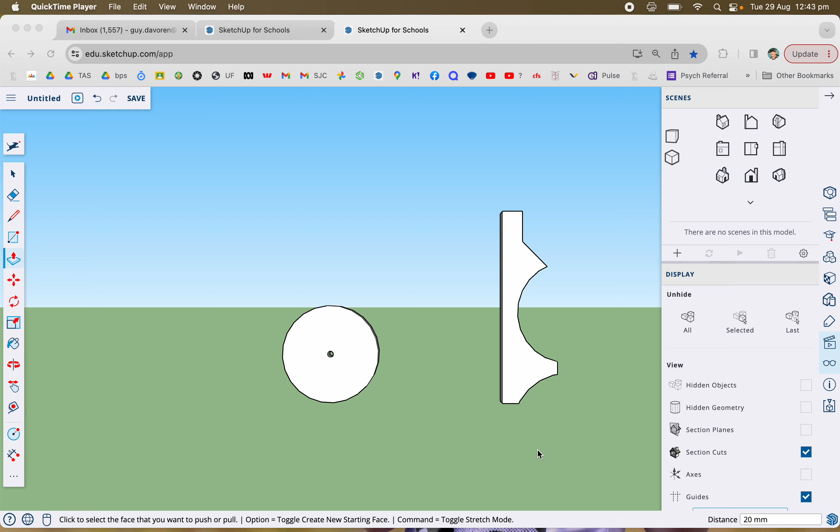Second part of this thing. Right, I've just got to check some measurements first. So,

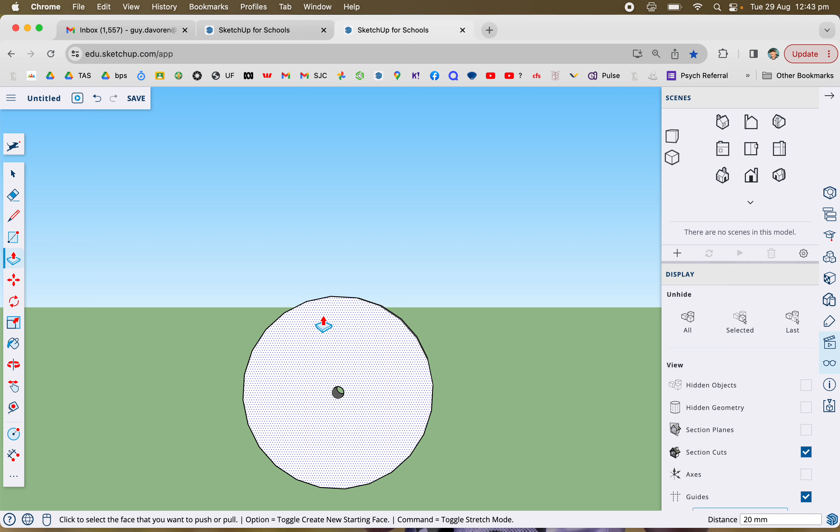Okay, and I just realised something that I forgot to do in the other one, that radius 15, but I'll do that straight up now. Okay, so there, yep. So on this one, put it back in the front view, I'm going to draw another circle, so I'm going to get a line.

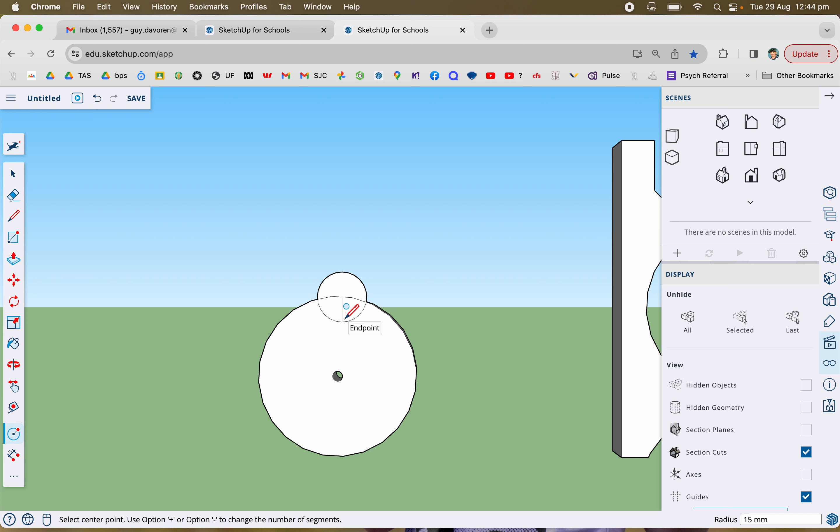There, bring it down 15, get the circle, and using that as the centre, that size, and then I'm going to delete those bits, and you can see now,

the thickness is gone. I'll give that back to the 20 again. I'm not sure what happened there, but I'll go to the 20. Okay.

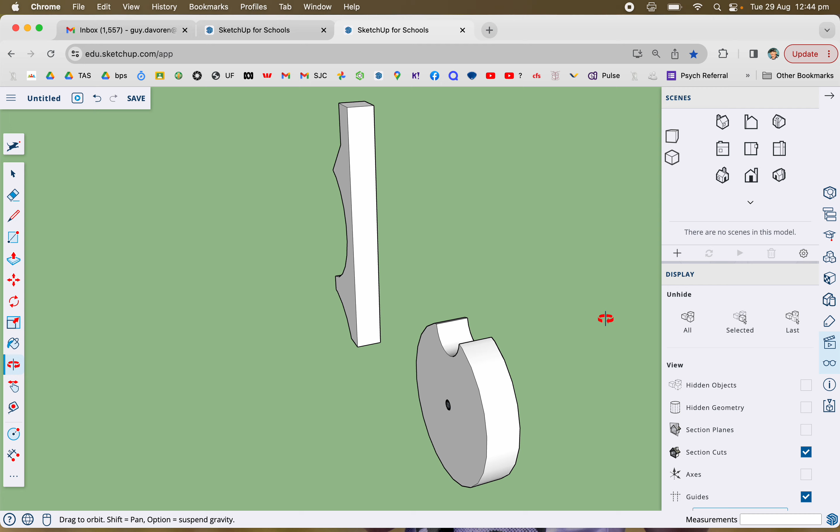Okay, that's what I want there. That's the piece that's going to catch the lollies and drop them through. And that was just a 15 mil.

Righto, so now what I'm going to do, I might make a group of that because that's not, sorry, a component. So I'll select that whole thing, make component, and I will call it lolly catcher. I better spell it properly.

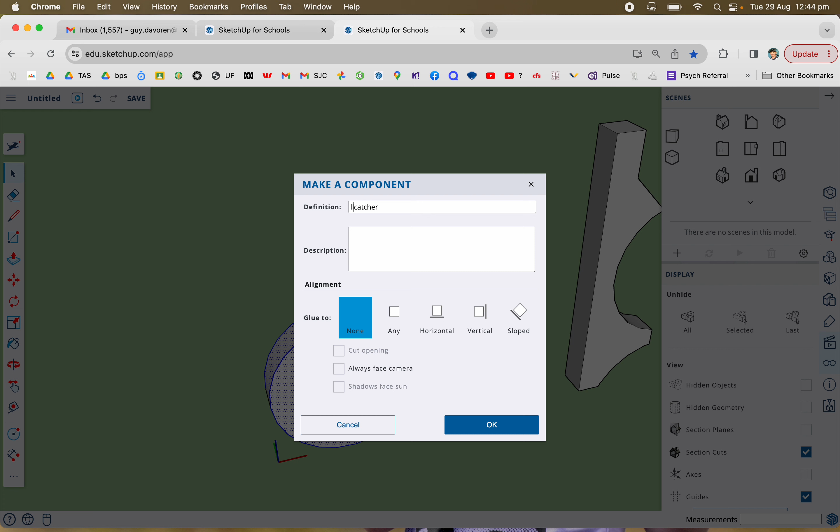Righto, that'll do for that one. And for this one, I'm just going to call that the side. Make component, side. Okay.

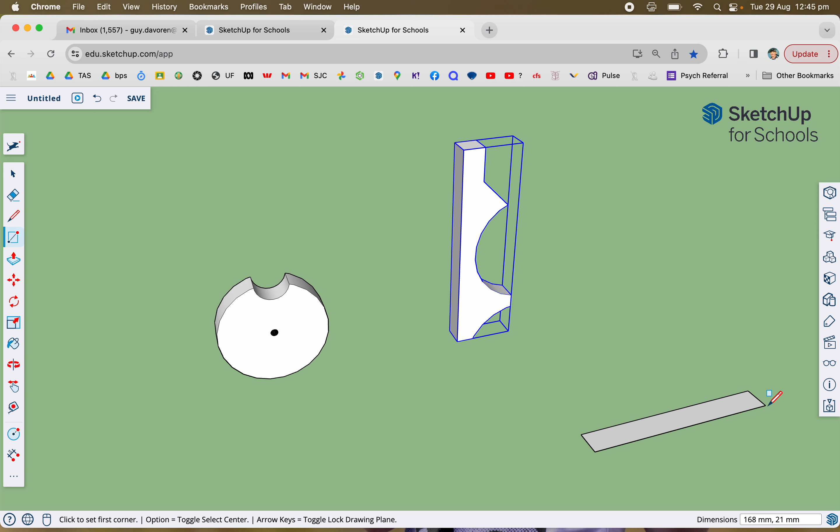Now I'm going to draw the back. So it's going to be, okay, across the bottom, I want that to be 130, 3. And then I'm going to bring that up 190.

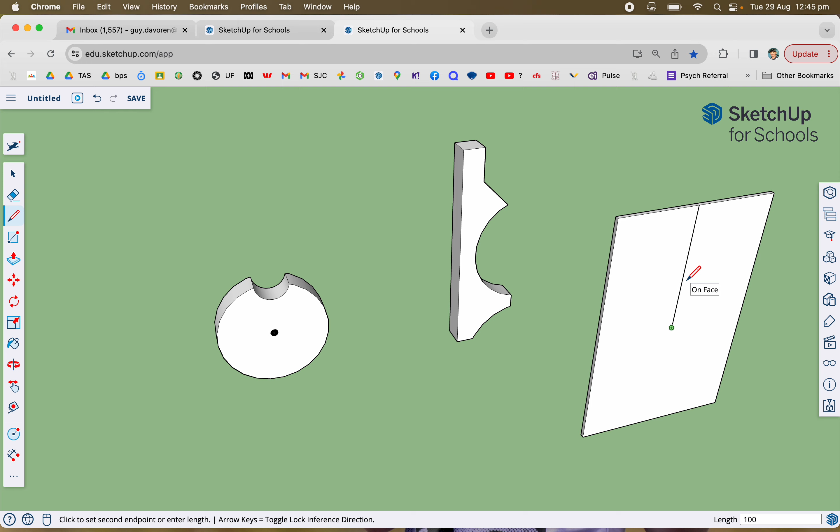That's that. Now we're going to have that, because it's going to have the little handle that turns, I want that circle or hole to be in the middle, so I'm going to come to the middle. Going to come down 100. Same size as that. Then we'll draw a circle in there.

Oops, get the right tool. There, circle. And it's going to be radius 3.

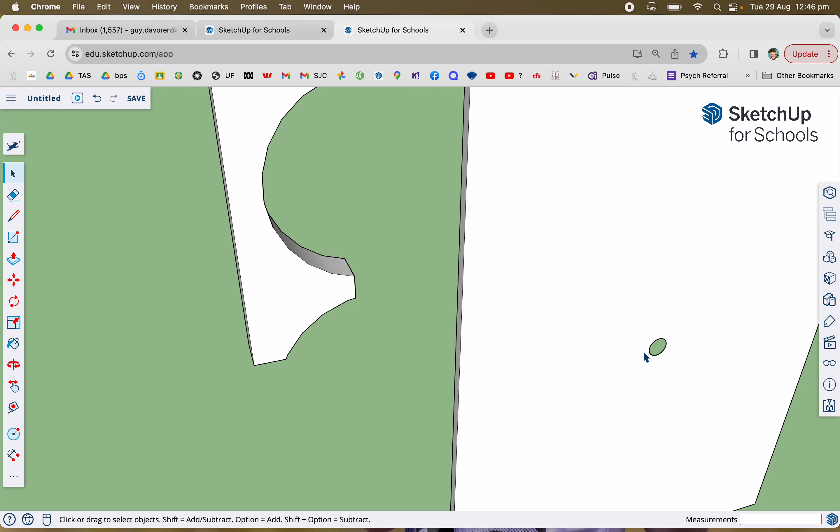Now we don't need to have that. Oops. That's it, get rid of that line. And I'll get rid of those inside bits. Okay, now that looks fine now. So that's, yep, that's just that one piece with a hole in it.

So now I'll make that a component. And I'll call that the back.

Okay. Now, we're going to start to put this together, so I am going to, so I might just move that one away a little bit. I'm going to work on this one. I'm going to make the one for the other side.

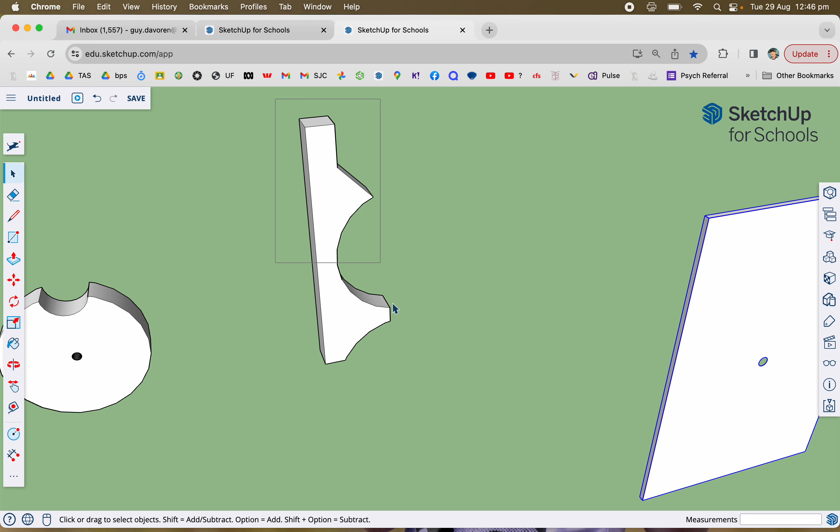So what I'm going to do is make a copy of it. So the move tool, and just move it, make a copy there. Now there's a number of ways you can do this, but what I'm going to use is the scale tool. If you wanted to, you could look down from the top and just rotate that around. But I'm going to use the scale tool, this one.

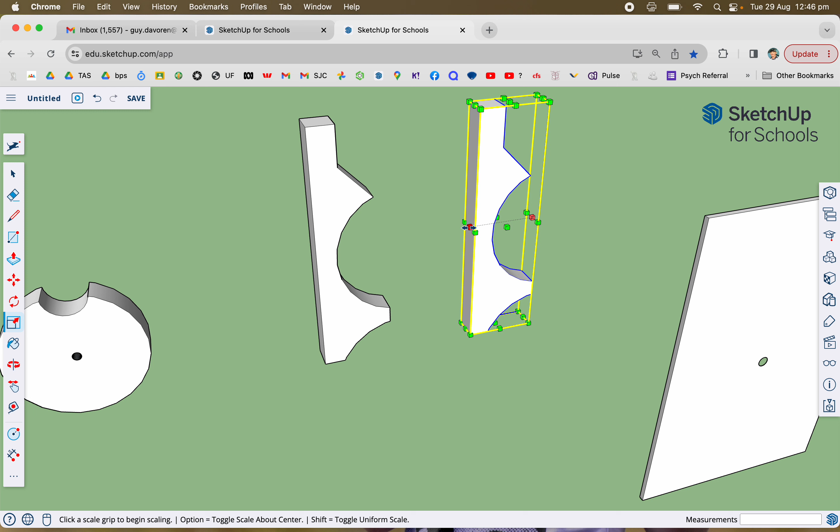Just make sure you get the middle handle, which is that middle one right in the middle there. Come through and type in -1. Enter that, and that gives me the exact mirror image of the other.

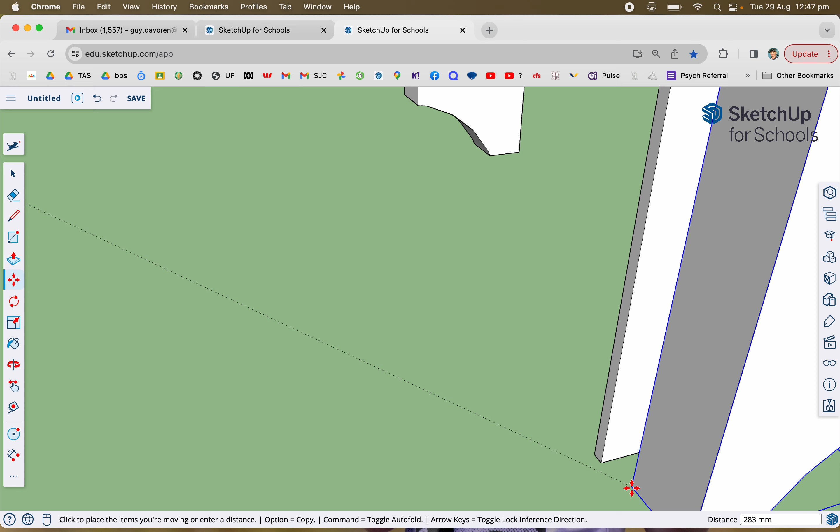Okay, so now I'm going to start to put things together. Move, and if I take it from that bottom corner, and I want to attach it to that bottom corner. Okay, so that's fine there. I'll just need to orbit that around a little.

And this time I'm going to take this one from that bottom corner and attach that to that bottom corner. There we go.

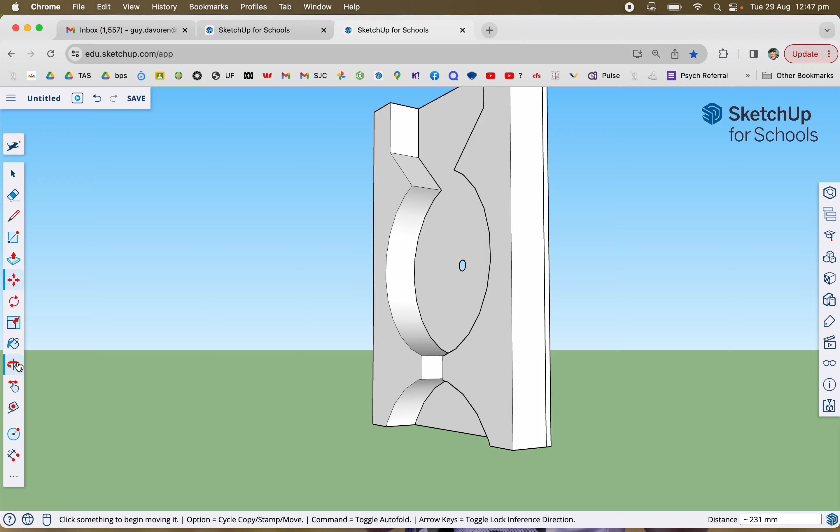And the last thing I'm going to do on this drawing, okay, so that's there. What I'm going to do is just draw a small piece of dowel, which is going to be the thing that holds the handle in.

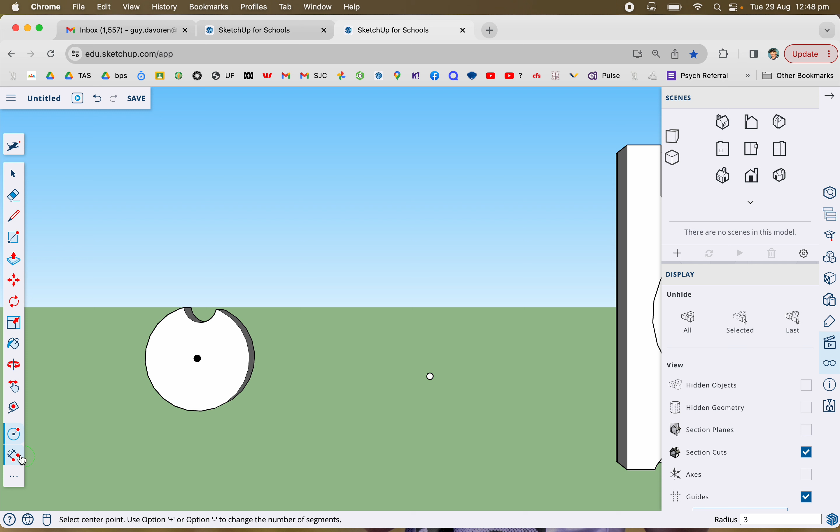So I'm going to put it in the front view. I'm going to get my circle tool. I'm going to go radius 3. And I'm going to orbit that around

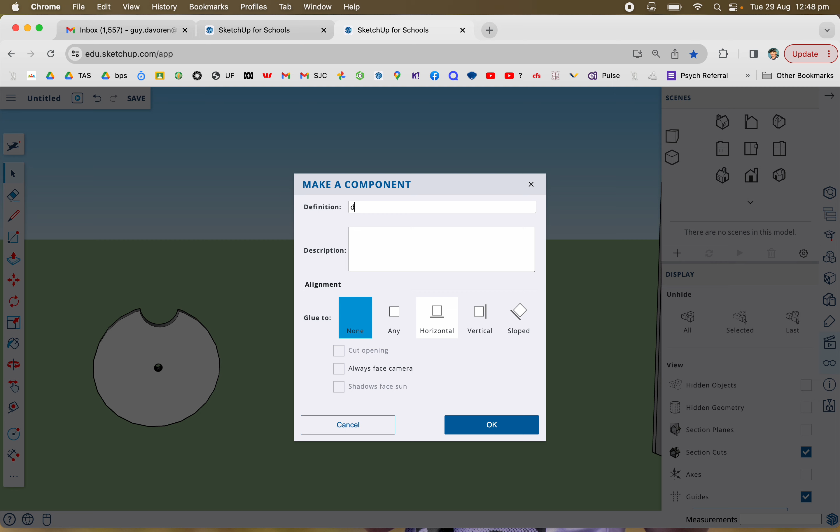there, make a component, and I'll just call that the dowel, D-O-W-E-L. Okay.

Now the last thing I'll do in this video, I might put that dowel into place in the backing. So I might have to turn that around. I'll move it in nice and close, turn it around,

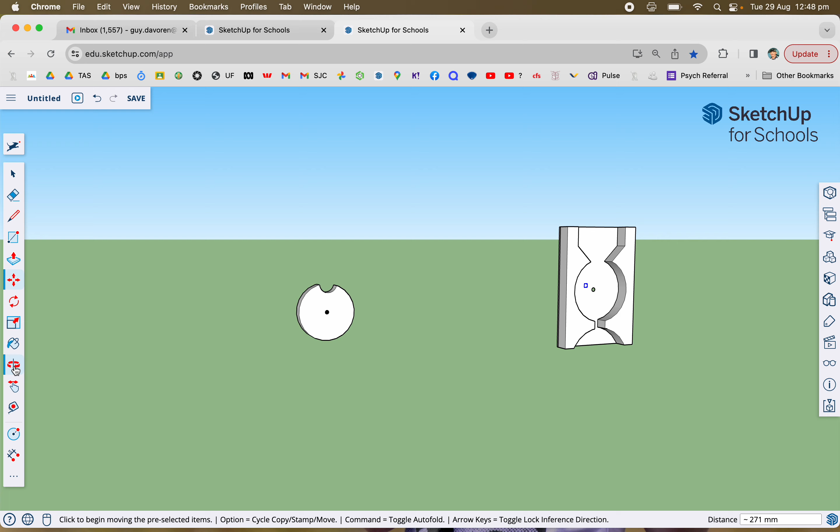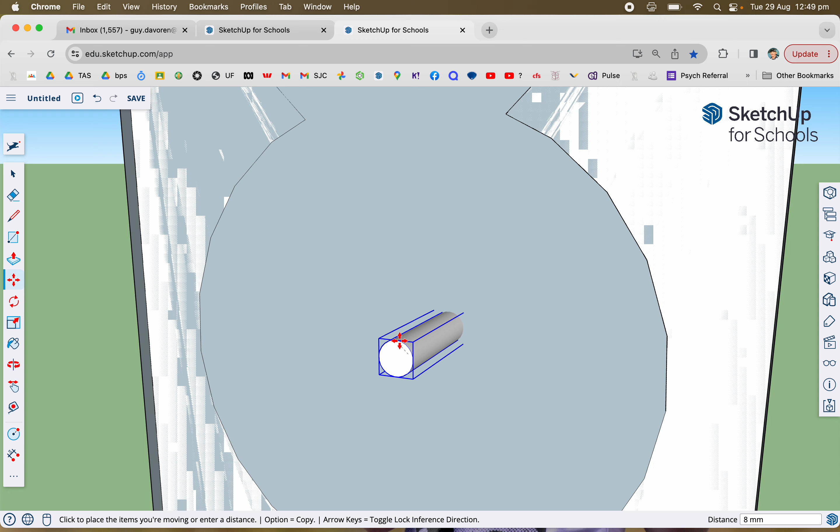now I want that piece of dowel, so move, I'll try and get the very top bit there, I'm trying to snap that onto the top of this one here.

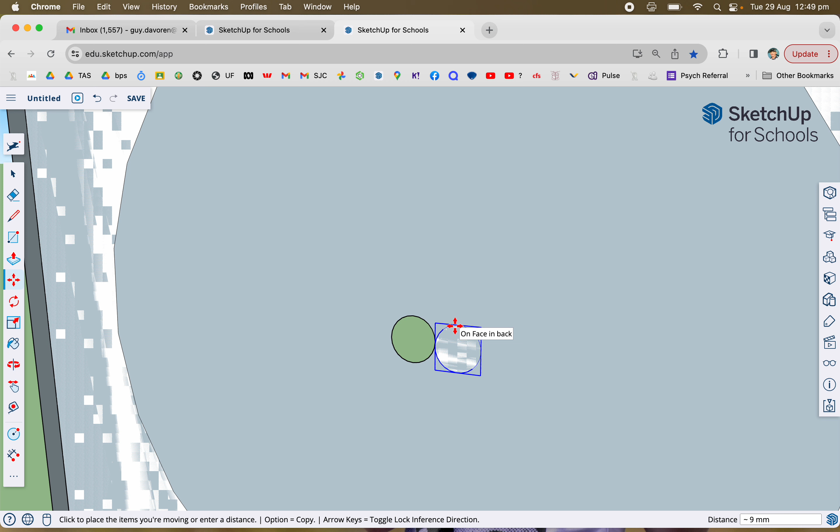Okay, so that's in place now. Doesn't look exactly perfect, but for what we're doing today, that's going to be close enough. So I will turn that back around. That's there. The dowel's sticking out.

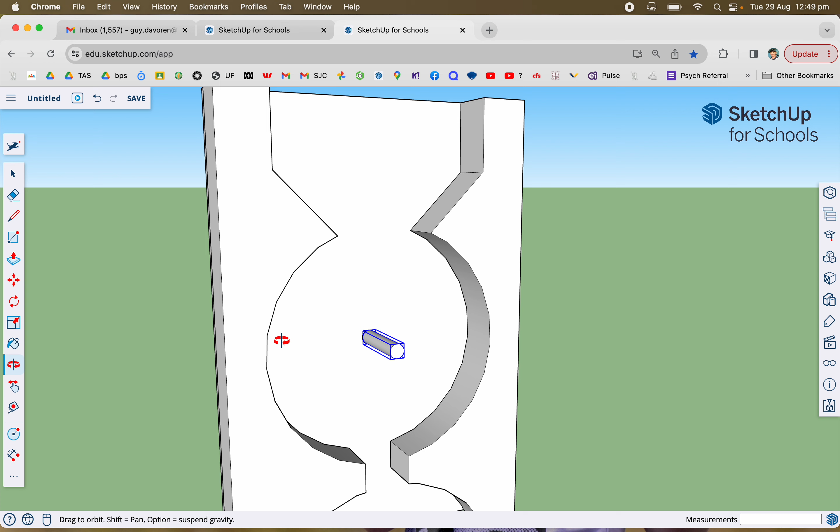Now what I might do now is, so that that doesn't change, I might just go bang and make a group of all of that, just so it doesn't come apart later on. Yep, I think I might leave it for that for video 2, and I'll move on to the next one. See you in a little while.